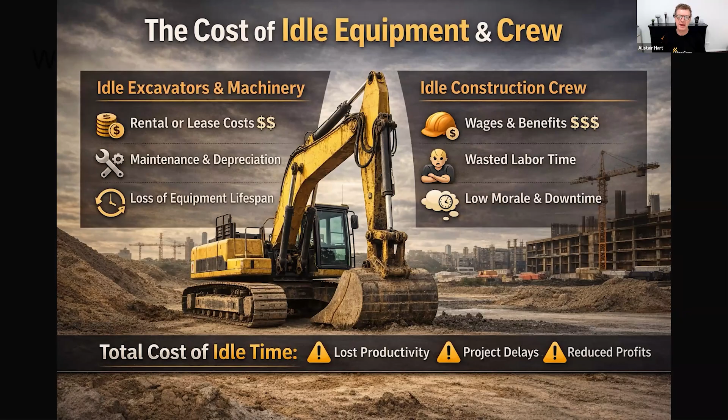Construction projects are often delayed by slow access to accurate information, rather than being delayed by a lack of accuracy in itself. As we've discussed, delays cost money. You know what else costs money? Rework. Correcting a surveying error after concrete is poured or utilities are buried costs 10 to 100 times as much as preventing it initially. Today, we're going to explore Emlid's GNSS ecosystem, which solves this by enabling non-surveyor crews to handle routine spatial tasks with survey-grade accuracy. Emlid receivers offer centimetre-level RTK accuracy and don't require heavy training, and we'll get into how that's possible shortly.

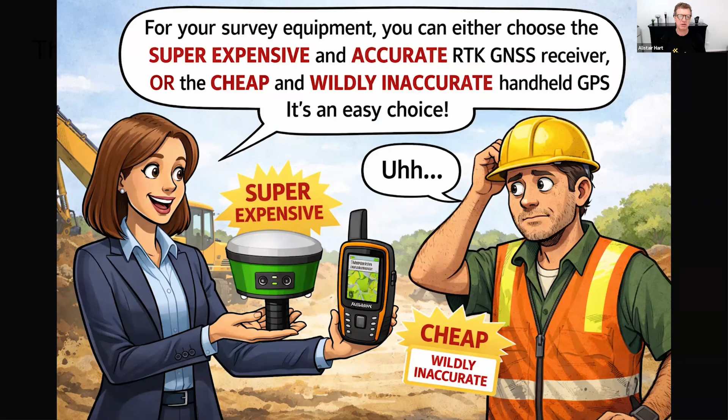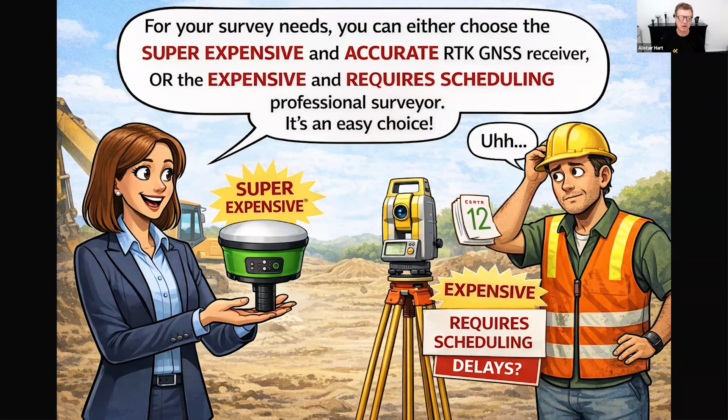Typically there were two choices and neither of them were very good. Buy an expensive professional RTK GNSS receiver, or work with something really cheap which doesn't offer the horizontal and vertical accuracy necessary for a construction site. So that leads to a third choice, which is to engage a professional contract surveyor. Depending on the scale of the project, that surveyor may not always be on site when really needed. And again, they're not particularly cheap.

Not only does Emlid offer affordable hardware, it offers real-time collaboration between the field and the office. In the field, the Emlid Flow app for iOS and Android simplifies complex GNSS work with visual guided steps for tasks like stakeout, cut fill checks, and as-built capture. No complicated setup or survey experience needed. It's just a phone in your pocket that's easy to use.

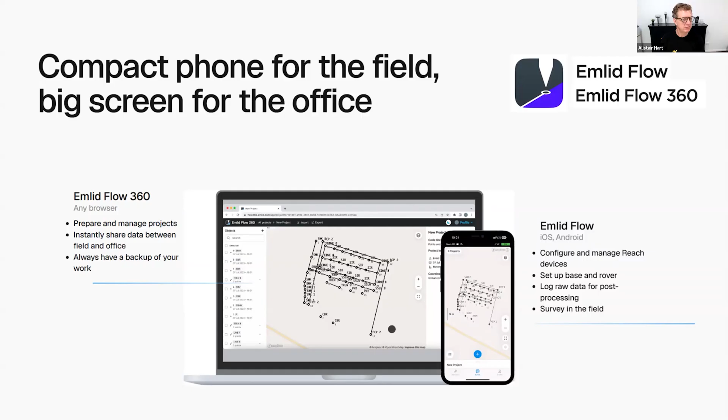Performing routine GNSS work in-house eliminates delays and reduces schedule risks without sacrificing precision. And this keeps surveyors essential for specialised tasks and keeps the site moving in the meantime.

So this is a site where they've gone ahead and constructed without having a surveyor on site. It's a perfect example of where not having a surveyor, or at least the equipment to stake it out for yourself on site, has led to effectively some rework. On this site, they did end up buying some Emlid hardware, and the Enviro on site was using that to help keep the earthworks moving and building to design.

One of the other benefits is tilt compensation, so they can measure accurately even with the pole tilted up to a significant angle. I believe Emlid claim accurate tilt compensation up to 60 degrees. What that does is save 50% of the time per measurement on average. And of course it also means you can take measurements on points that aren't safe to stand directly over, like excavations and that sort of stuff. Tilt compensation is now embedded in every Emlid model.

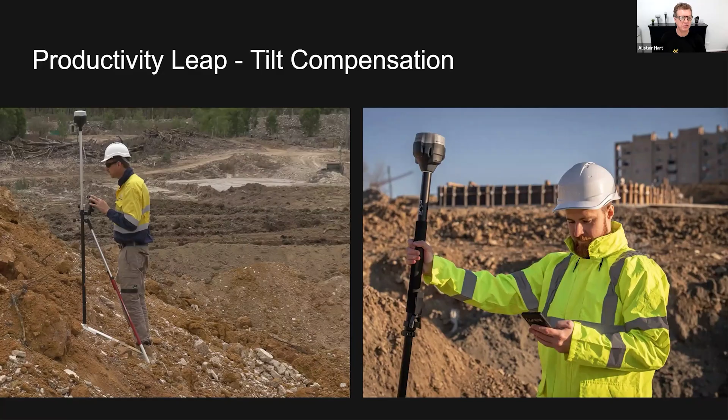The other benefit of the Emlid receivers is that they're really adaptable, because they use internet-based corrections for an incredibly simple user experience. It's great for urban areas to be able to connect to AUSCORS, SmartNet, AllDay RTK, or other NTRIP corrections. And the AUSCORS one is a free Australian government correction.

But they also, at least the RS series receivers, contain embedded LoRa radios for remote base and rover setups in areas where you don't have mobile coverage, and UHF frequencies to connect with legacy third-party base stations. So if there's a Trimble already set up on site and broadcasting in Trimtalk, the Emlid receivers can consume that correction to deliver accuracy without you having to set up your own base.

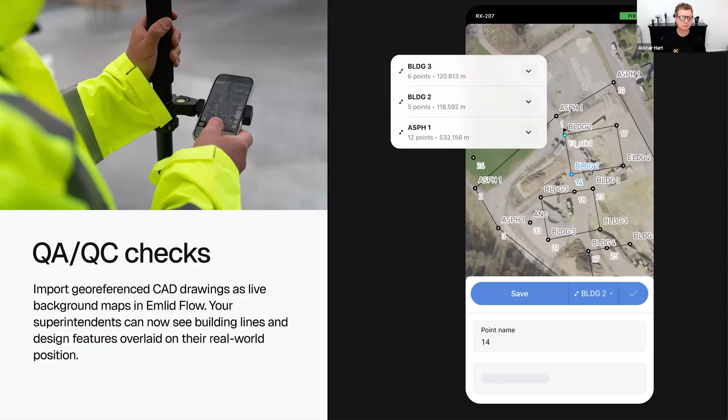And then the operator out in the field clicks on that surface, says stake it out, and it's telling him how far he needs to cut or fill to bring the level of that landscape to the surface. And I think one of the big benefits here is avoiding over-excavation, because over-excavation is expensive and it's really easy to do if you're just doing cut by eye.

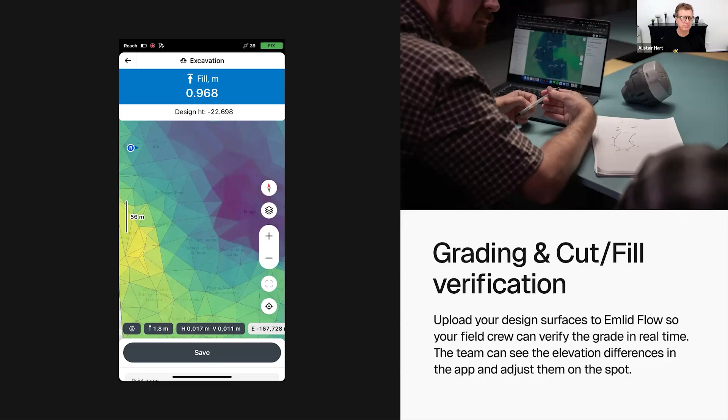And once you disturb that ground, you've got to go back and refill it and compact it, it starts to get expensive. Another example of things that construction crews can do is setting out the design onto the landscape and marking it for earth movers to engage with themselves.

So in this interface, you can see that we've got a phone, and the phone has got a three-dimensional surface and a whole bunch of strings from AutoCAD showing the alignment of an embankment, with toe of embankment, top of embankment, diversion drains down the bottom side of that. So it becomes quite easy for construction managers, project managers, to be able to drag and drop the DXF and LandXML files into Emlid Flow 360 on their browser.

And when they do, it instantly syncs to the field technician's mobile device. I think we've got some slides on that later on.

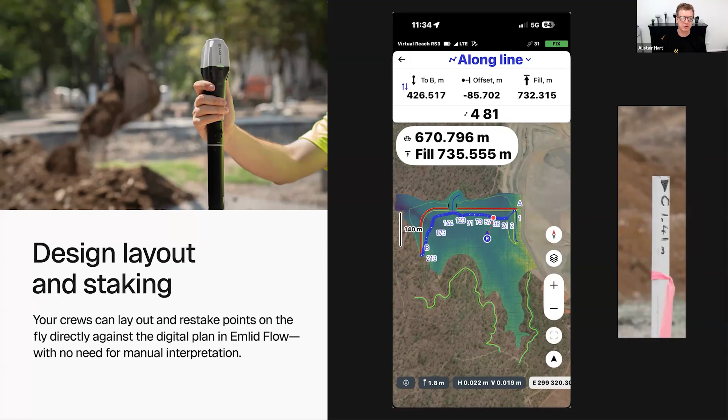And then, of course, there's as-built and utility digitalization or documentation, basically doing your ASCONs. So you can pick up what has been constructed before it gets buried, and that makes it so much easier for people to know where utilities are and how far down they are before the utilities are buried in the first place.

And that makes the job of underground service location contractors like Chris so much easier, because then they have precise information to work with, and they're not relying on interpreting ground penetrating radar or other nuanced information sources to identify the location of some of those utilities.

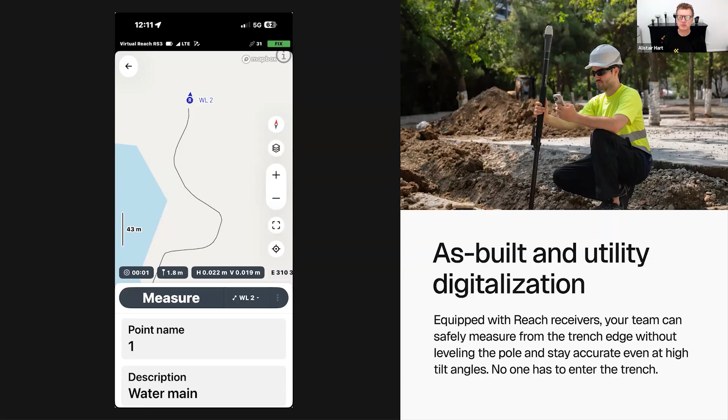In this image, you can see the Emlid Flow mobile app, and this guy's out there staking cut and fill, and that could easily be done by a foreman. So it's not just the guy going out and marking it out for the earth movers. It can also be a foreman or a supervisor that's wandering around and just checking on stuff, and being able to do that relatively easily without waiting for the specialists.

And in fact, we've got a major international construction company that's active in probably every state in Australia on major infrastructure builds like highways and interchanges, and they're using Emlid gear quite a lot.

And if anyone would like to know more about that, we've actually got a DIY cheat sheet on how to do that with open source GIS software. So once you've collected the points, how to convert that into a surface. If anyone wants to know more about that, hit our team up and we'll be happy to share that information with you.

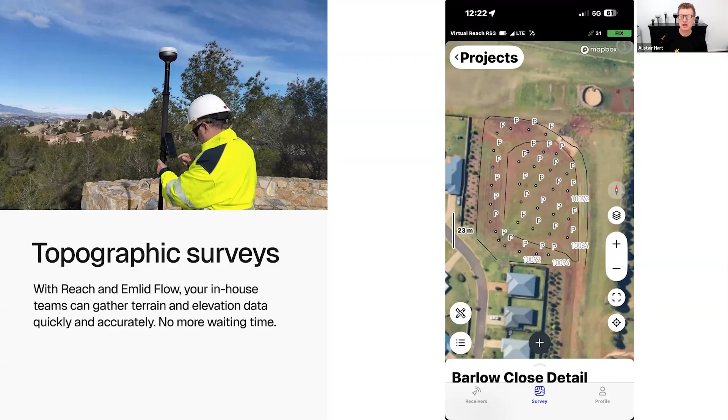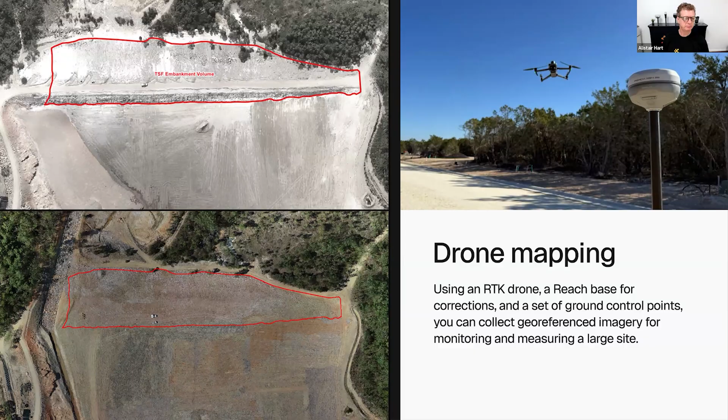We talked before about eyeballing earth moving cuts and over excavating. An interesting statistic I came across is that eyeballed volumes can often be out by up to 40%, and that can really quickly erode project profit margins.

The example I came across was quite specific, where the site manager had estimated there was 5,000 cubic meters of cover that needed to be shifted, but in reality it was around 7,000 cubic meters. That's a 40% overrun right there. If you'd estimated 5,000 but you're paying for 7,000 cubic meters, that's 2,000 extra cubic meters you've got to shift and pay to get shifted, but you're not getting paid to shift it. That's a huge dent to the project bottom line.

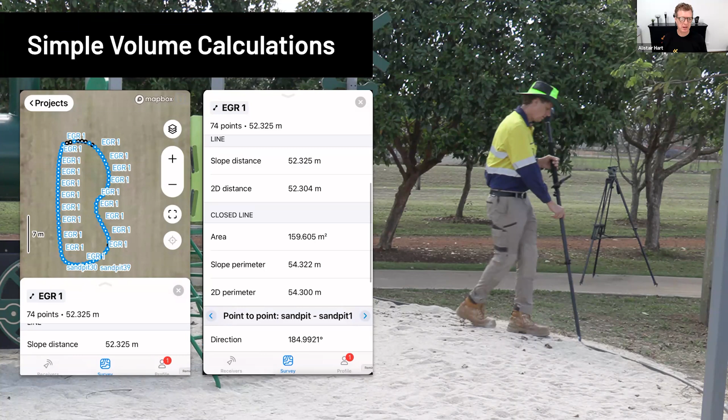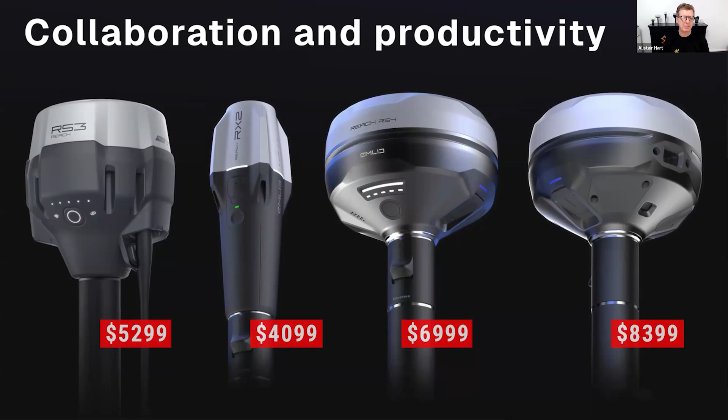Reflecting back on the affordability of the Emlid hardware and the fact there's no ongoing firmware maintenance costs — Emlid provide all of that free for the life of the product — the basic version of the software is free, and if you want the advanced version, you're still only talking about $375 a year. You can see from these prices it doesn't require large capital investments, and from the examples we've given, it doesn't require heavy training either.

So now it's an opportunity to hear from the audience: how much are your construction sites spending on external survey fees? Or how much did you spend on that before you built your own DIY capability?

I also just want to welcome Craig Sandy, who's the Surveyor General for Victoria, who's just joined the poll. How are you going, Craig?

You'll be pleased to know we've got a slide later in the presentation reinforcing that we don't want people doing DIY cadastral surveying moving boundary pegs and the like around.

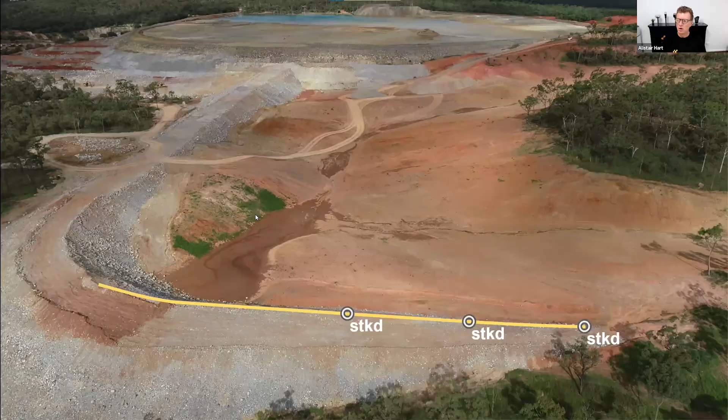Thanks, Alistair. So as mentioned, Phil Wilson here from Trilogy Consulting. We're an Adelaide-based environmental and geotechnical consultancy, and we work most closely with developers and contractors to try and provide practical, cost-effective environmental and geotechnical solutions.

Being an environmental and geotechnical consultant, our surveying needs are usually modest, but we need dependable spatial information, which Emlid has filled that gap as a business really well. It was initially purchased to support drone operations, but as we became more familiar with the Emlid product, it quickly provided value in other parts of the business as well.

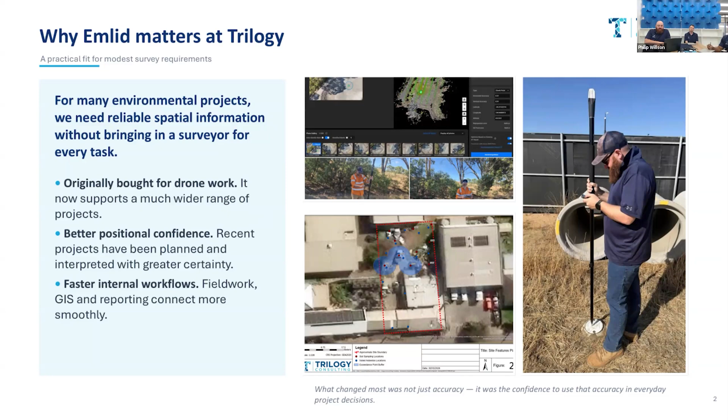The biggest gain has been confidence in our data. We can plan work, understand constraints, and communicate outcomes with much stronger positional basis.

One of the clearest benefits has been on-site planning for us. On a recent project, we loaded the site drawings into Emlid and could see the site boundaries and work constraints in real time. This let us discuss restrictions on site without needing prior pegging out or separate surveys to support. Example of the above plan that you can see on that top end there. This was a high-level waste management site and saved a small developer approximately $80,000 just in disposal fees alone.

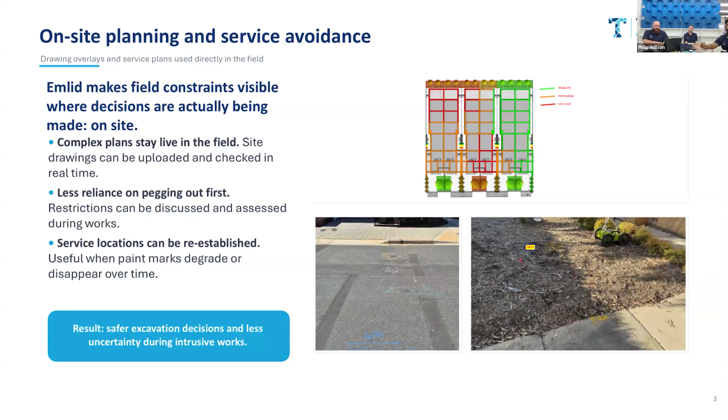The same applies to service locating, and once service plans are spatially referenced, we can return to those points even after physical markings have faded, which improves safety and reduces uncertainty during excavation and intrusive works.

Emlid has also strengthened our GIS workflow. The same platform that supported drone operations now helps connect field capture with reporting for waste classifications and similar investigations. Sampling points can now be recorded with much higher confidence rather than being approximate dots on a plan. When those outputs are linked into ArcGIS, site figures can be prepared quickly with often very limited manual adjustment. That improves both efficiency and the quality of the final deliverable.

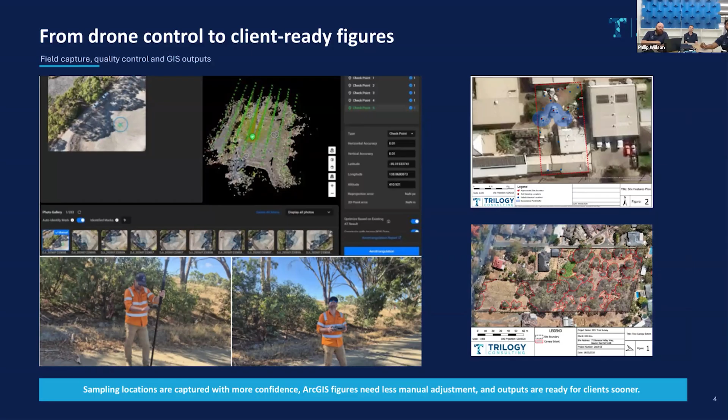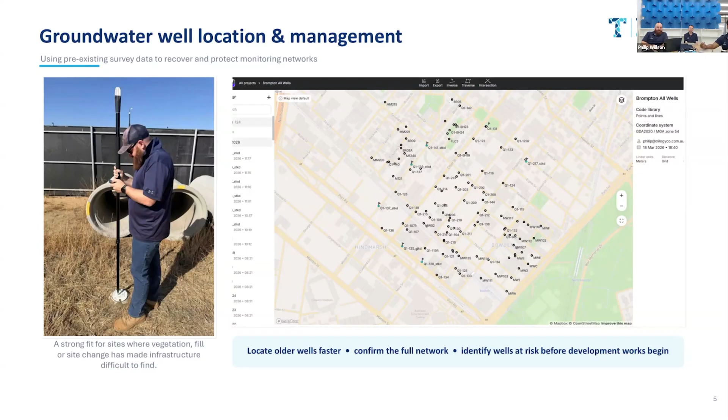Another strong case for us is groundwater monitoring wells. On older, more complex sites, wells can become overgrown, buried, or effectively lost. By loading the pre-existing survey data into Emlid, we were able to locate the full well network much more quickly with greater confidence. It also helped us identify which wells were likely to be affected during future development work so they could be proactively decommissioned, avoiding unnecessary costs and reducing risk and project delays.

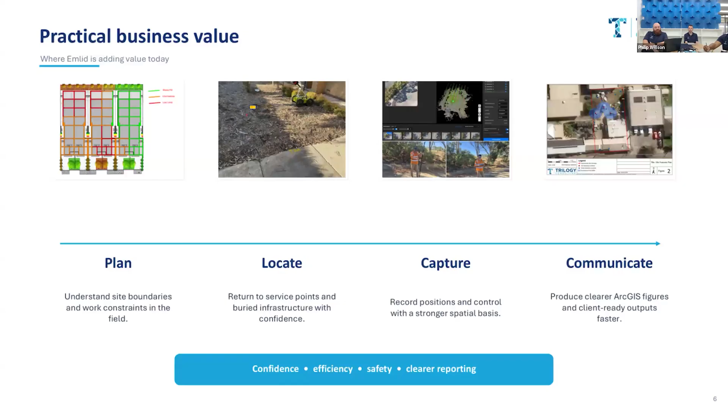Taken together, these examples show the practical business value for Emlid and Trilogy. It supports planning, locating, field capture, and client communications as one connected workflow. That means higher confidence in day-to-day work, better efficiency in the field, and safe decisions around services, infrastructure, and cleaner reporting outputs for clients.

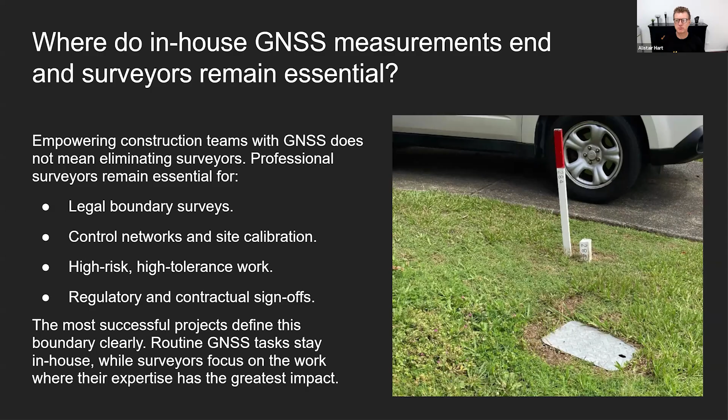And of course, professional surveyors are also really helpful for more complex, high-value tasks, such as establishing control networks and site calibration, doing high-risk and high-tolerance work, and ensuring that regulatory and contractual sign-offs are appropriately and defensibly assessed and reported. So the most successful projects and customers are those that define this boundary between what DIY surveying can do and what needs professional surveyors, so we can keep them focused on areas where their expertise has the greatest impact.

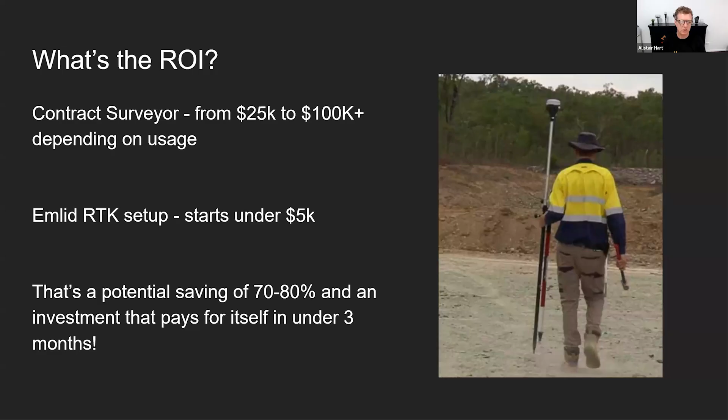So with that said, let's take a look at the ROI. If you've got a contract surveyor, we heard some figures from under 20,000 to more than 40,000, and depending on how much you're using a contract surveyor, that cost can extend to $100,000 a year pretty easily. So an Emlid RTK setup starts at under 5K, and that's a potential saving of at least 70 to 80%, and an investment that pays for itself in under 3 months. When you take that into account, the ROI is pretty compelling.